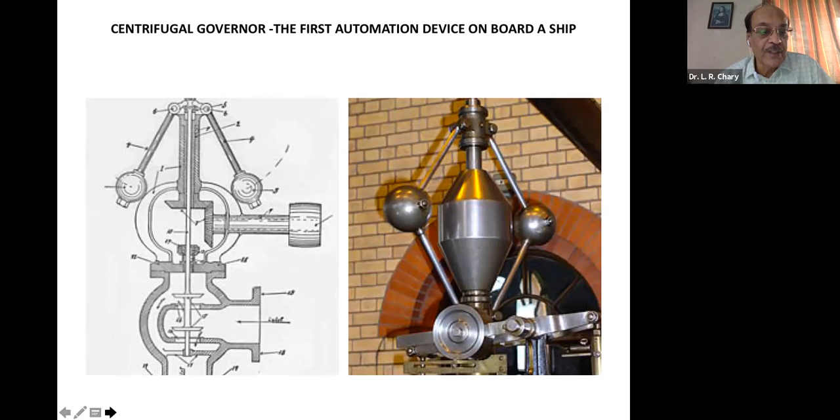Now let's take a look at the other automation devices that came. In 1908, the gyrocompass, followed by the autopilot. Autopilot is the name given to the device on board aircraft, but it used to be called self-steering gear on board ships. In 1925, it was boiler automation and the echo sounder. Between 1936 and 1940, during the war years, it was radars.

Between 1965 and 1970, many automation devices came on board, starting with the main engine, generator, and condition or trend monitoring systems. Classification societies like Lloyd's Register and DNV gave names like UMS, Unmanned Machinery Space, and E0 class of ships. Then between 1970 and 1975, satellite navigator and locator; 1975 to 1980, shipboard computers and LAN; 1980 to 1985, satellite communication and GPS; then in 1990, programmable logic controllers.

Between 1995 and 2001, we know all GMDSS equipment came on board. In 1995, the concept of the Internet of Things was introduced, surprisingly not by an engineer but by a businessman who wanted all his businesses and factories to be connected. The development of autonomous ships started way back with the Chinese in 1970 — it is definitely not of recent origin. This went on up to 2018, and between 2018 and 2021, autonomous ships were launched.

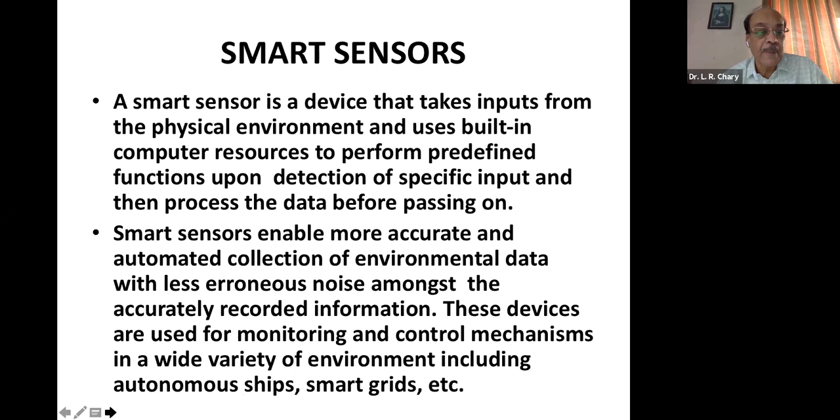I'll give you an example which will convey it better. You have on board a ship, generators, and in the generators you have the windings, field, the armature and field windings. In these windings are placed temperature sensors called PT100 to monitor and sound the alarm if the temperature of the generator goes up. So when the alarm comes, the electrical officer goes, takes a look at it, feels the temperature of the generator. If it is too hot, he shuts it, opens the generator, sees whether the sensor is defective.

Replaces it with a new sensor and starts it off. But when you have an autonomous ship with nobody on board, who will do all these things? So in an autonomous ship, a smart sensor takes care of everything. There are two sensors implanted there, in what is called a watchdog mode. One watches the other's performance, and if one of them goes wrong, it automatically switches to the other.

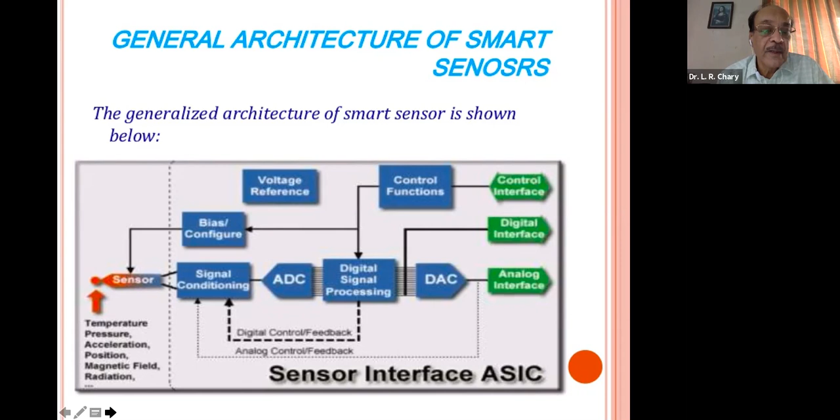We'll see, because it is about sensor and sensor fusion, what this sensor fusion technology is about. Sensor fusion technology is the technology used to combine data or information from a variety of sensors such that the resulting information has less uncertainty or more clarity than what would be possible when these sensors were used alone.

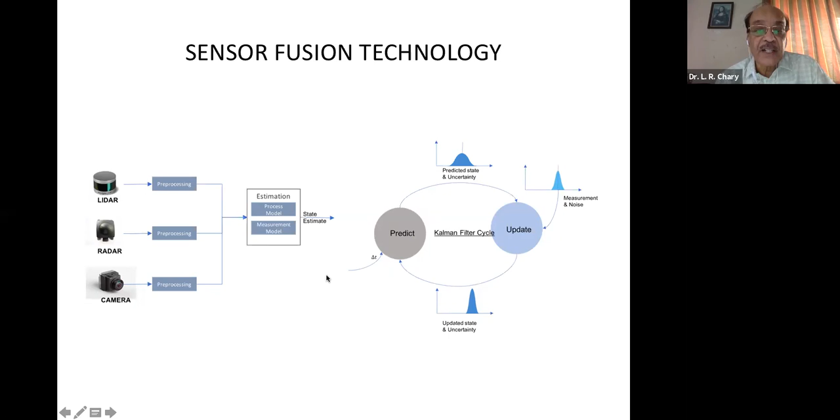Mathematics will not leave you. So all of you sip your cup of tea to keep awake.

Sensor fusion technology uses a Kalman filter, which is not a physical device, but an algorithm based on control systems. This is called the state of the system. State here, in simple terms, is the position, velocity, and acceleration of the target ship. Then you have a measurement device which measures it, and these two are compared, and it generates what is called the Kalman gain. This gain refines the data and gives out finally the exact clear version of the position, velocity, and orientation of all the target ships.

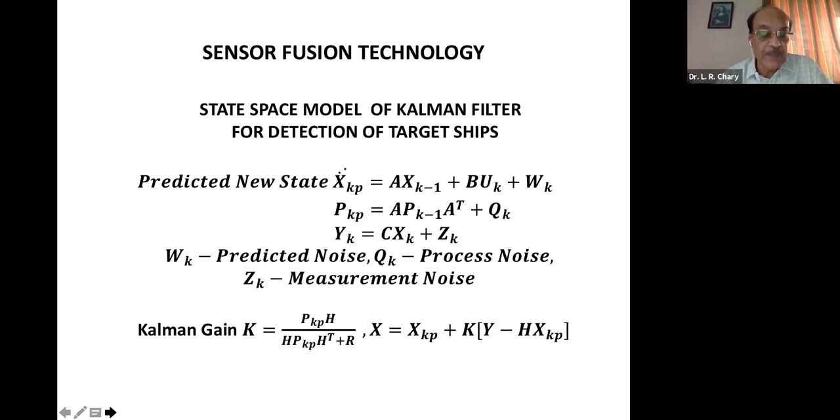This is how it works. Let's not go too much into it. This is the state space equation, and this is the cycle which you saw, the Kalman cycle.

Is Kalman filter the only filter? No, there is another called the particle filter. Which is better? Both are good. In the Kalman filter, the inputs and outputs follow Gaussian distribution, with little randomness. But if you have a situation where the inputs and outputs are stochastic, the particle filter does a better job.

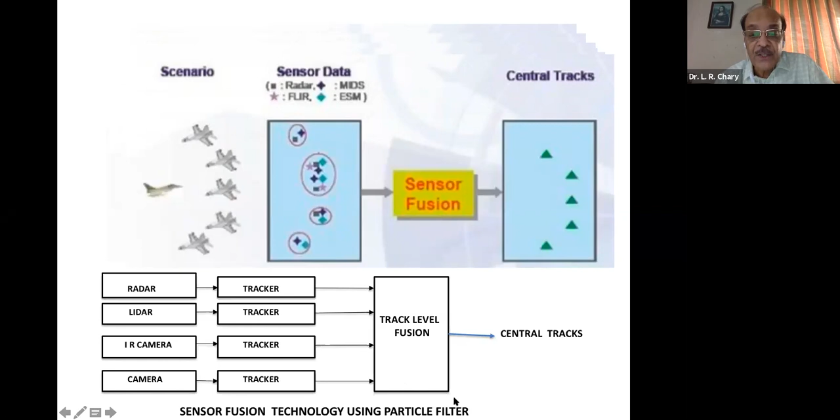Those of you from Calcutta must know the ISI, Indian Statistical Institute. It was headed by Dr. C.R. Rao, who after retirement went to the USA. He's still alive, 100 years old, and he contributed a lot to this particle filter.

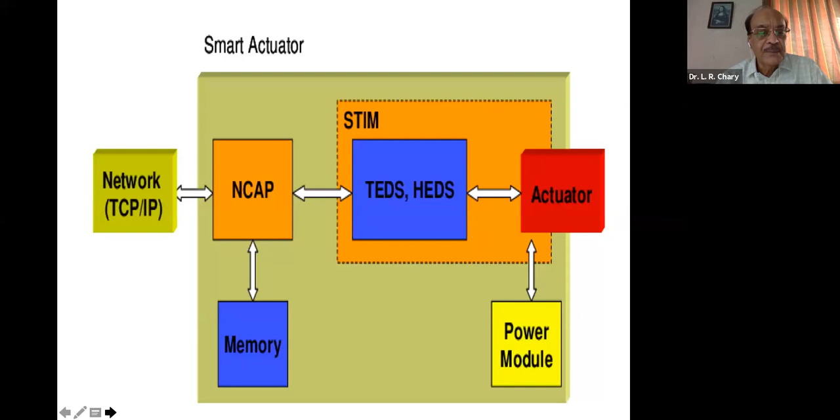Now we come to the Internet of Things. It is a network of physical devices, appliances, and other items embedded with electronics, software, sensors, actuators, and network connectivity that enables these objects to connect and exchange data without requiring human-to-human or human-to-computer interaction. This is a bookish definition. Each object is uniquely identifiable through the embedded system, but is able to interoperate with the existing internet.

This is better depicted with a diagram, the Internet of Things diagram: any device, anything, anybody, anywhere, any service, any business, any path, any network, any place. This is precisely what Internet of Things means - total connectivity, where each can communicate with the other through humans or even directly.

This is the ship systems all of you are familiar with - the maneuvering system and navigation system on the deck side, and on the machinery side you have machinery management, power management, and propulsion control. Propulsion control is with the navigation system, alarm management, cargo management, and ballast management. These are the engine side smart systems, and these are the deck side smart systems.

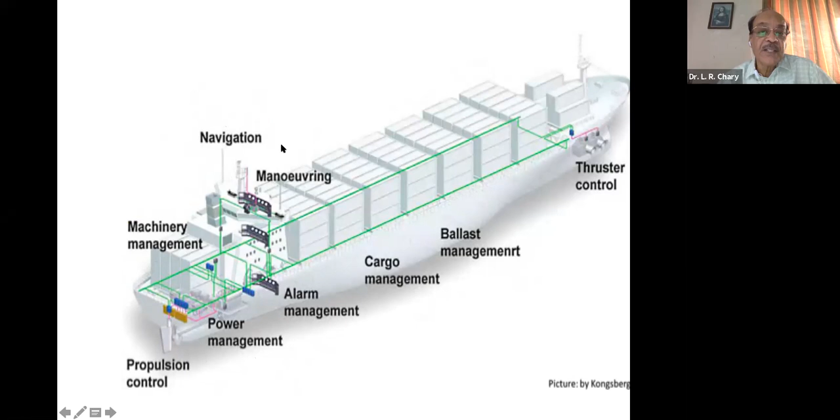When you put them together, it becomes the Internet of Things for ships. All these are a network of smart systems - machinery management, power management, etc. - which you have seen. And each one of these systems is made up of a network of smart subsystems.

This is how the diagram of a smart ship would look: you have all the deck side smart systems, all the machinery side smart systems, and then all of them connected. It is connected to a backbone, and that is connected to a SATCOM or VSAT.

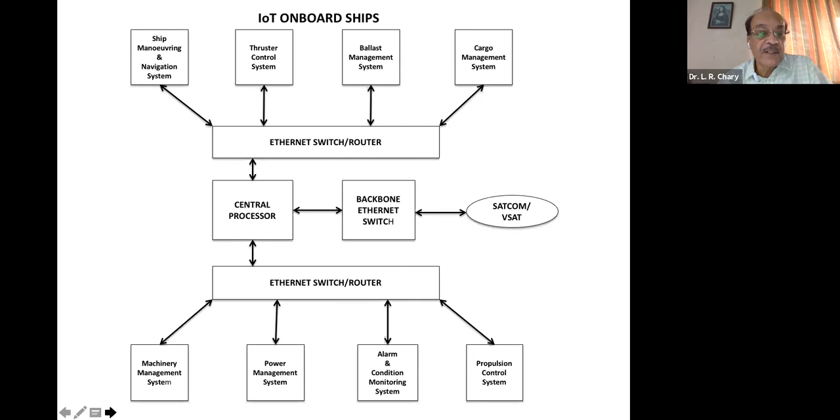But something is missing - can you guess what it is? This is all about what is happening inside the autonomous ship. But what about outside, just outside? That is more important for navigating the ship. That is missing here, and this is what it is - it's called the situational awareness system of an autonomous ship.

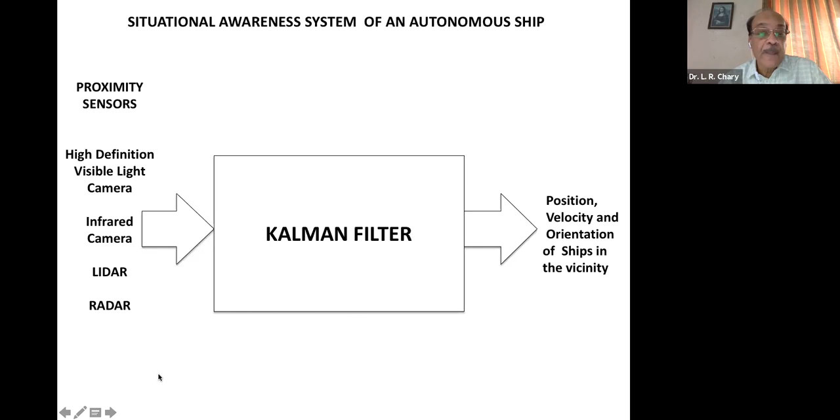We saw the Kalman filter, right? These are the sensors for the Kalman filter: high definition light camera, infrared camera, LiDAR, and radar. It filters out unwanted data and gives the position, velocity, and orientation of all the target ships. When that is plugged in here, it completes the Internet of Things on board autonomous ships. You have smart systems here, smart systems here, and a smart system telling the ship what is happening outside.

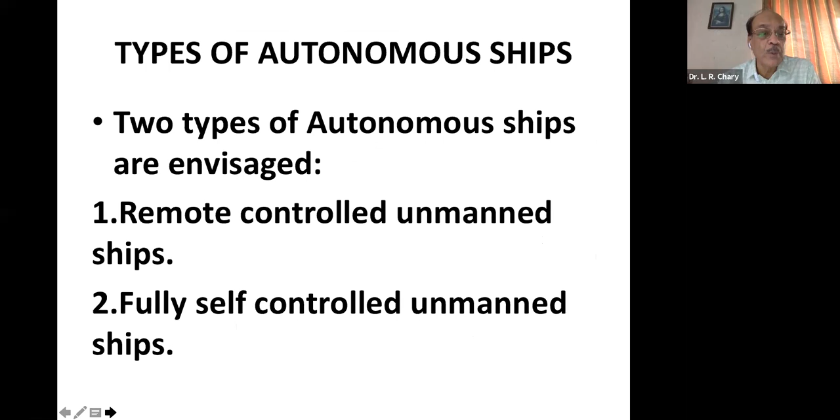It can be controlled from outside, from a remote center, or it can be self-controlled. There are two basic types of autonomous ships: remote controlled unmanned ships, which can also be remote controlled manned ships - that is what NYK has also started with these autonomous ships, you will see about it later - and fully self-controlled unmanned ships. Now, this diagram captures it all. This is a normal ship about which all of you know.

This is the remote control ship. This is the one which senses what is happening outside the ship, gives input to the shore-based controller who controls the ship, and through satellite, he controls the action of the ship itself.

This is a totally automated ship without anybody intervening. It is a fully automated ship where the computers do all the control and navigate the ship. And this is a combination of both.

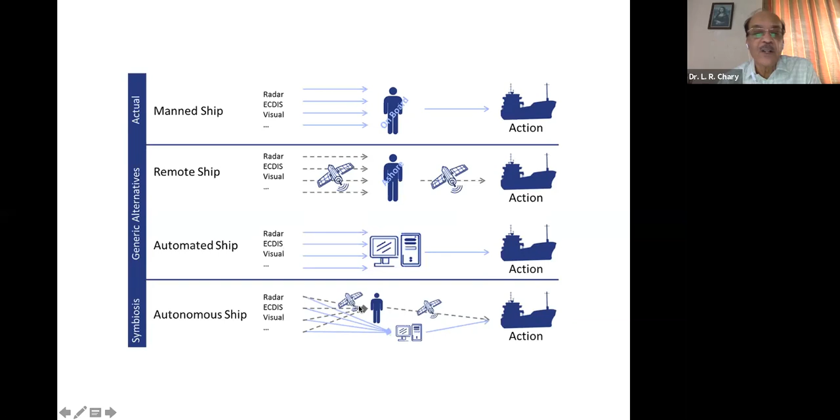Now we'll take a deviation here and see how an artificial intelligence captain navigates in autonomous ships and how he avoids any possible accident. Now, the governing equation comes under what is called reinforcement learning. You have artificial intelligence and you have machine learning. Machine learning is a subset of artificial intelligence. And under machine learning, you have three types of learning: supervised learning, unsupervised learning, and reinforcement learning.

So for autonomous steering of ships, the reinforcement learning algorithm is used. This algorithm is based on the Bellman equation for a decision to alter the course of the own ship to avoid possible collision. This is the mathematical expression.

What it says is the utility or usefulness of taking a particular maneuvering action will depend on the immediate reward and all the future rewards with a discounted factor. The above equation is the Bellman equation, which is solved iteratively, which we will now see how it is done. This is the utility or usefulness of the decision you take, which is based on...

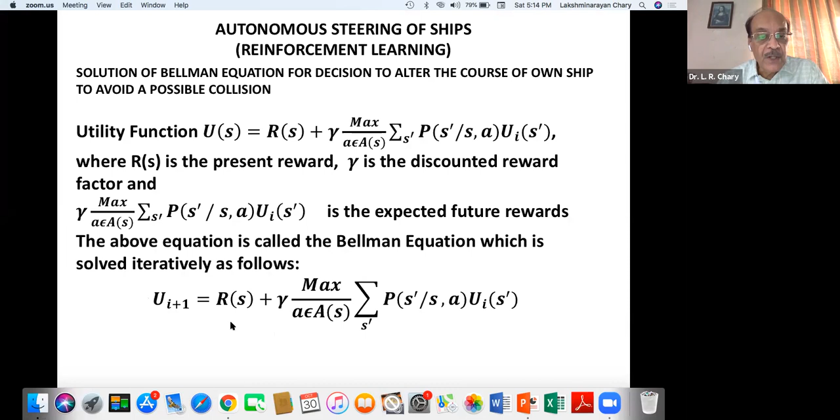So this is the utility function, present reward and all future rewards. Based on this, the decision to steer the ship to the starboard side or port side will be taken. But you know the rules of the road: the reward is when you encounter another ship coming in the opposite direction, you are supposed to steer to the starboard side. So there is a positive reward.

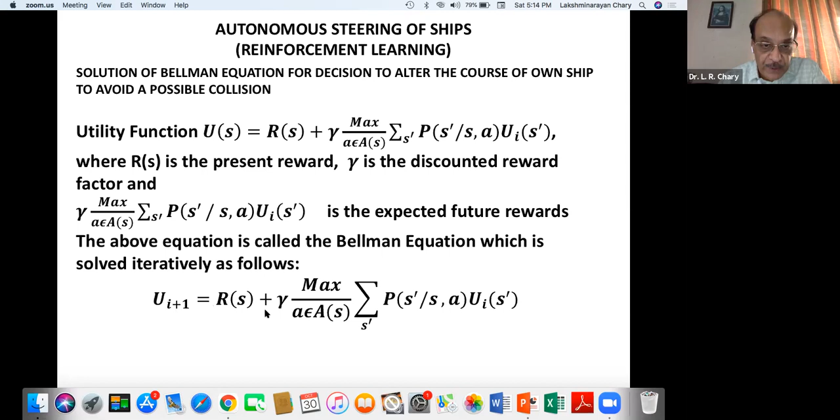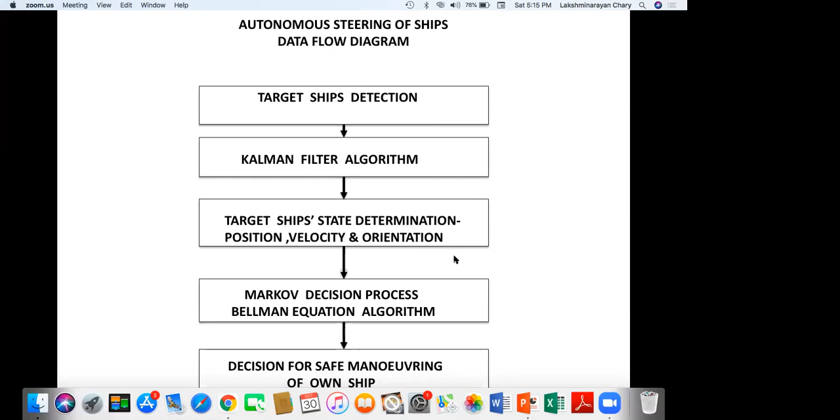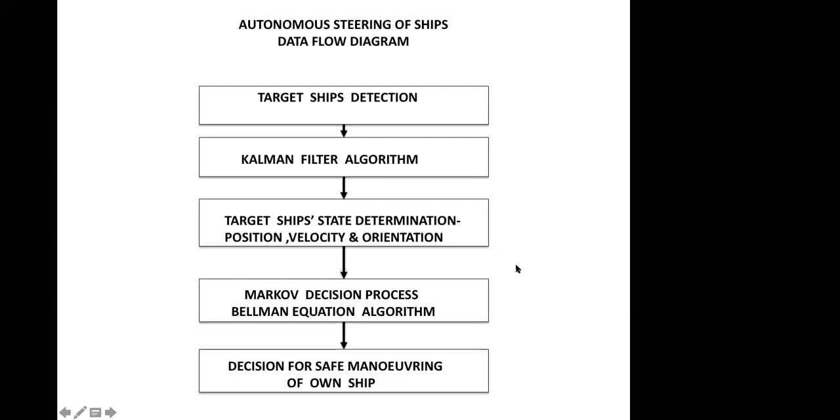So we are losing track, we are losing your voice. Ijaz, can you come in, there is some problem? Reward, yeah. Yeah, so we can see you again, sir. I think we are going back to this diagram, right? Can you see this now? Okay, one thing, maybe we can see the PPT, but I think there is lesser bandwidth right now, so if possible we can switch off the video during the presentation, I think that may help us. Hello, can you see it now? Yes sir, we can see it. Sorry to intervene, but I agree bandwidth is the problem, they can switch on and off the video. We can't hear him now. Let's just wait for a little while, I'm sure he's trying to get back properly, maybe he's having some issue. Right, yeah, we can hear you and we can see the screen now, sir.

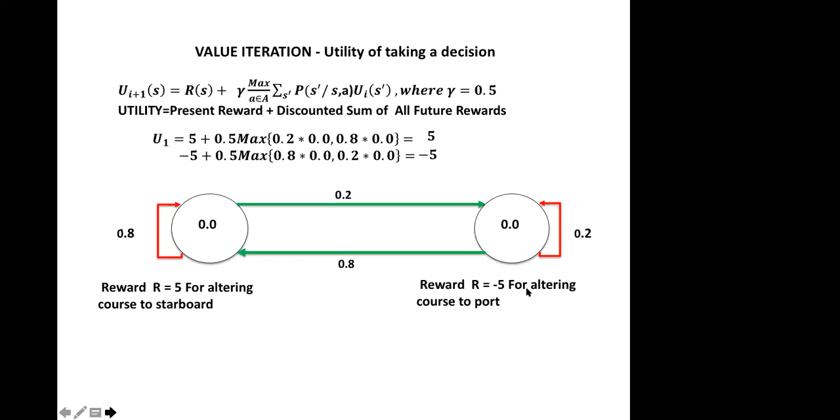Now you will see the iteration operation in this. The first iteration after initialization, a reward of 5 is given to steer to the starboard side, as you see it here, and a reward of -5 is given if the AI captain tries to steer to the port side, because he will definitely go and hit the ship from the opposite direction. So you initialize with that and then go to the second iteration: 5 points here, -5 points here. Okay, so the next iteration, it goes to 7 points here and -3 points here.

The third iteration, again, it goes to 7.8 and -2.2. The fourth iteration, it will again increase to 8.2. So this is how the iteration takes place, and the decision will be taken when finally it settles down to the best value. And how do you do that?

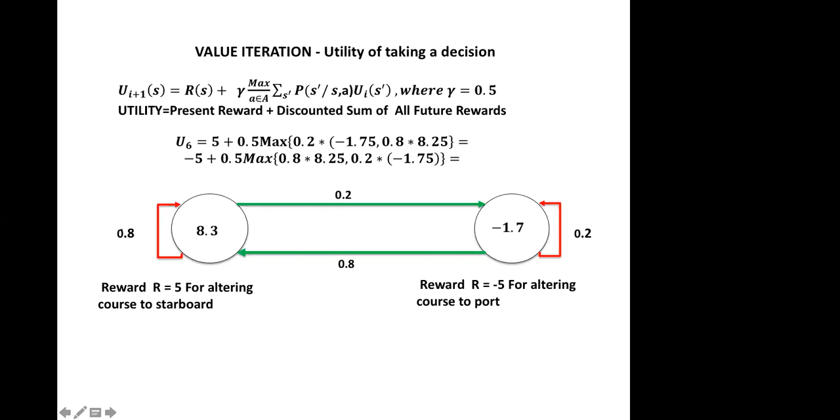Now this is 8.25 and -1.75, and then the next iteration, the sixth iteration, it becomes 8.3 and minus 1.7. Now you compare the last two iterations: if it differs by 0.05, that is the saturation point, and you can safely say that since 8.3 is greater than -1.7, you must steer the ship to the starboard side, and that is what it says in the foregoing six iterations.

Now, how long will this take? Because of the speed of the computer, the entire process takes a couple of milliseconds to arrive at this decision.

Okay, now what happens here on? We go back to this diagram. This is the situational awareness system, where the Kalman filter is sitting, and the Bellman equation receives the inputs from the Kalman filter. The iteration is done here, and based on which is the most advantageous maneuver, the ship is turned in that direction.

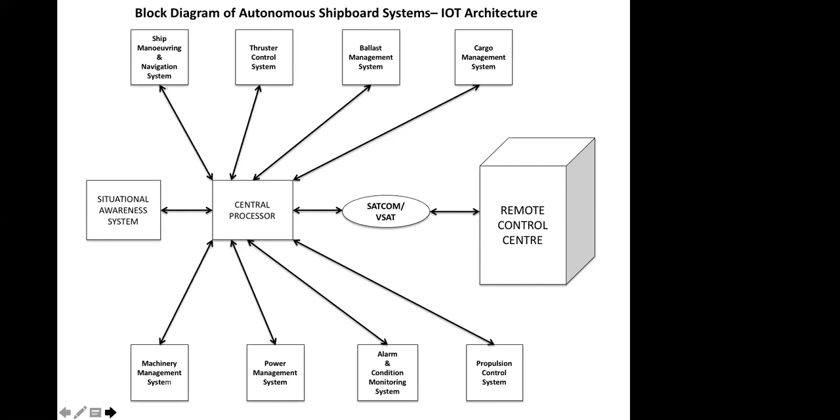Again, it is advantageous to steer to the starboard side because that is what the rule of the road also says. Now we will see it in action.

This is the first project they started of autonomous ships. It's going to take off in a couple of months. It is called Yara Birkeland. What you have to notice here is how the ship navigates to the starboard side when it faces a ship in the opposite direction. Okay, now here it is.

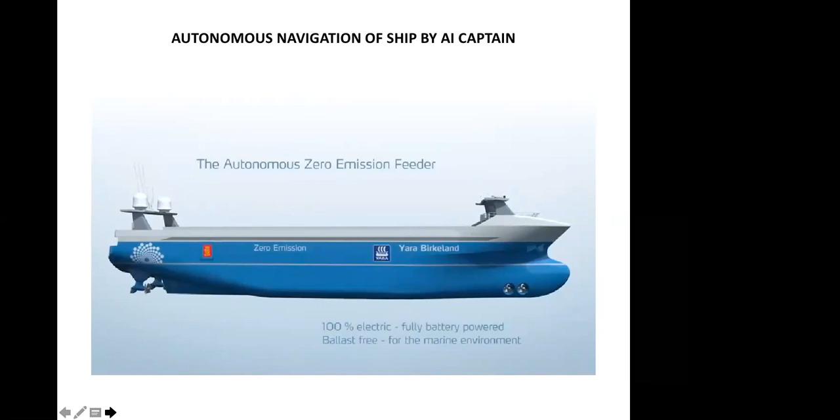They were formerly moving all the containers on land. Now they want to shift it to an autonomous ship. The containers are loaded automatically, autonomous loading. So more jobs lost.

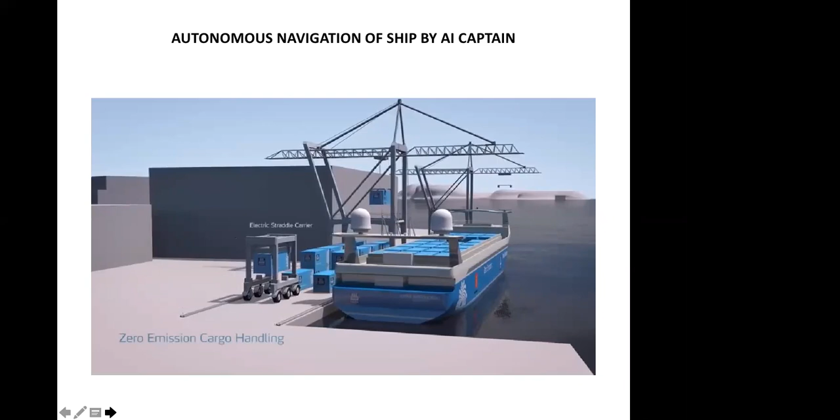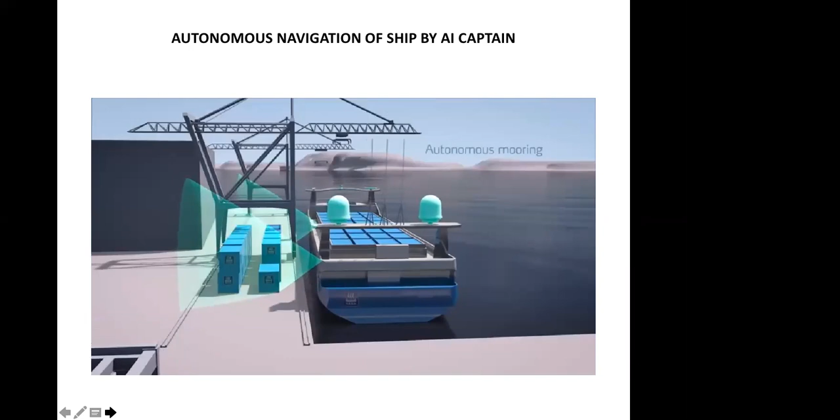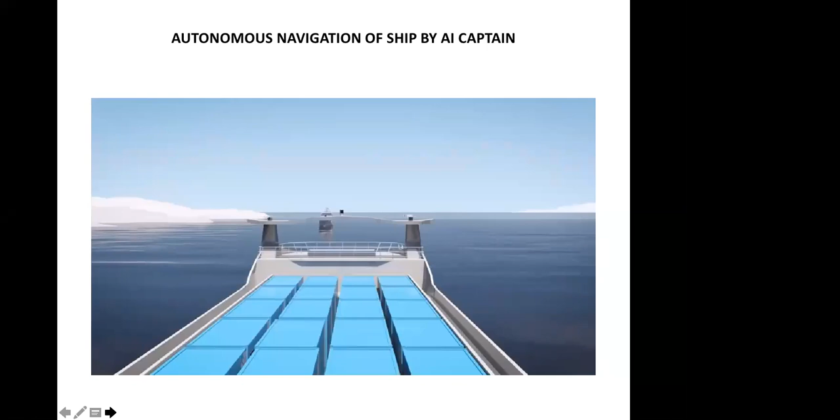After the loading, a preferred route is charted. The ship undocks by itself and sails autonomously. After some time, it will face another ship in the opposite direction and maneuver itself to the starboard side to avoid collision.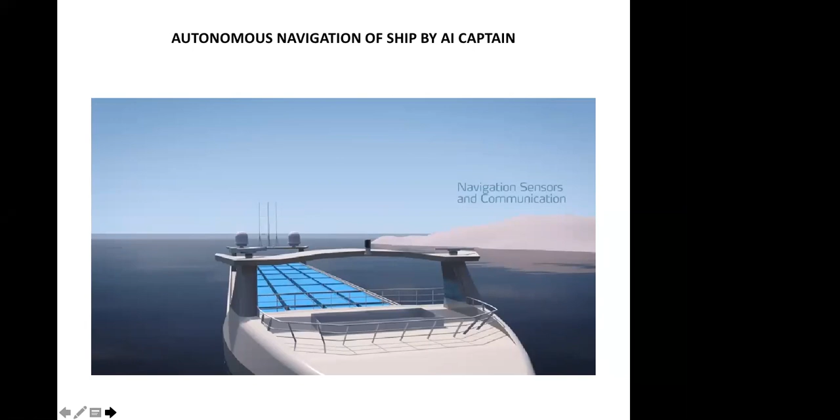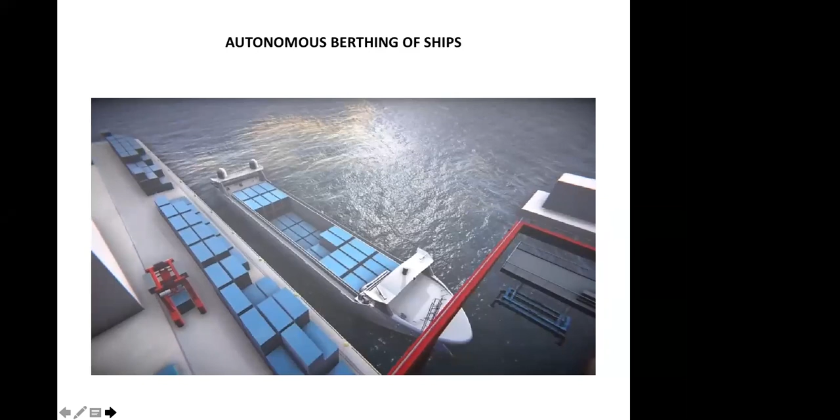Now we will see an autonomous berthing, how the ship autonomously berths. This is by the McGregor people. They have devised the system. It is for the same ship. Have a look.

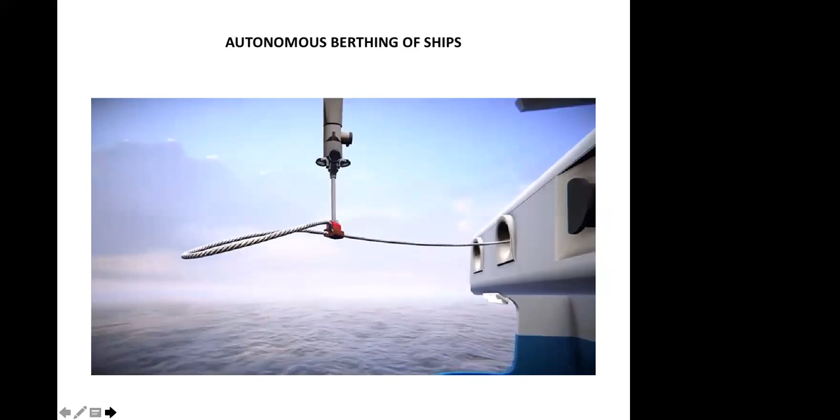So all made fast, declared without the berthing crew, and the ship will start loading or discharging. So many more jobs threatened.

Now let's look at the pros and cons of autonomous shipping. Yes, let's first look at the pros. Short port stay, faster turnaround, both are linked. No crew cost, hence lower operating cost. Because of this, lower freight rates. No accidents due to human error or failure because there is no crew on board. No cases of criminalization of seafarers. No dependence on crew supplying countries like India, Bangladesh, and so on. And the ship owner is in full control of his ships.

Let's look at the cons. Vulnerability to cyber attack, you saw the diagram. Anybody, just as a person sitting at the remote center can control the ship, anybody who can hack in also can control the ship. Increased piracy threat. Obviously, if you think you are advanced, the pirates are more advanced than you. They can hijack your ship, unload all the cargo, and then leave it alone.

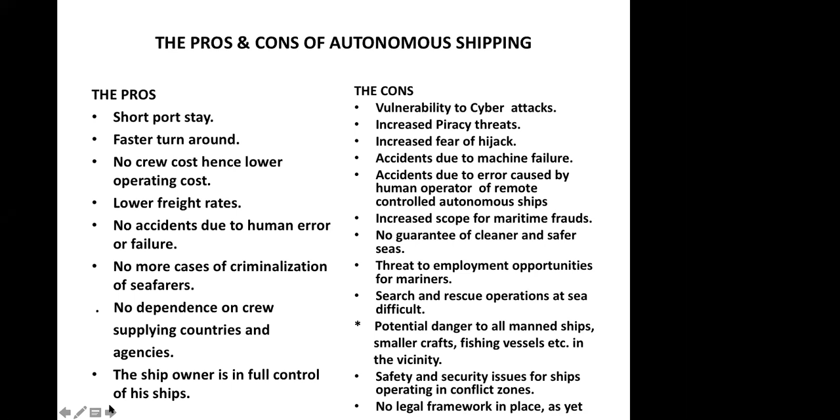Now let's take a look at what are the existing conventions: SOLAS, COLREG, Rules of the Road, MARPOL, GMDSS, STCW, Maritime Labour Convention. All these become irrelevant because they are all applied to manned ocean-going vessels. Hence, these conventions need to be reviewed and regulatory requirements redefined by the IMO to make them relevant to autonomous shipping.

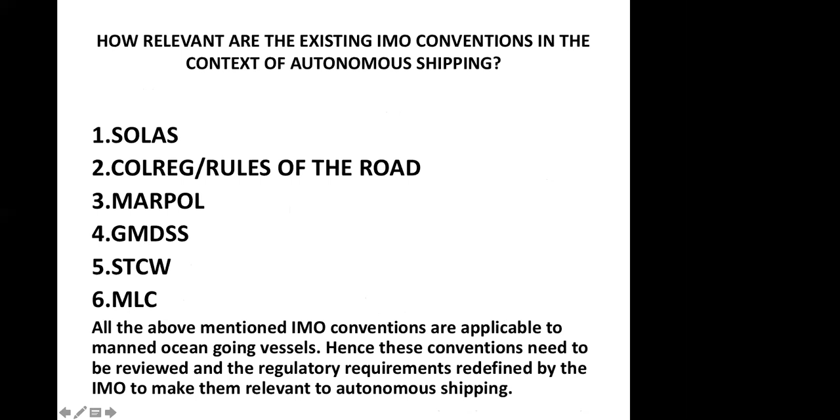Let's look at the journey to autonomous ships. We started with automation in 1965. Then progressively the automation increased on board. In the 1970s and 80s, there were 70 to 80 crew members on board, total strength. Soon that started reducing. Some large ships got reduced to 28 or 20, and even to 10 in the 90s. Soon you'll see large ships without anyone on board.

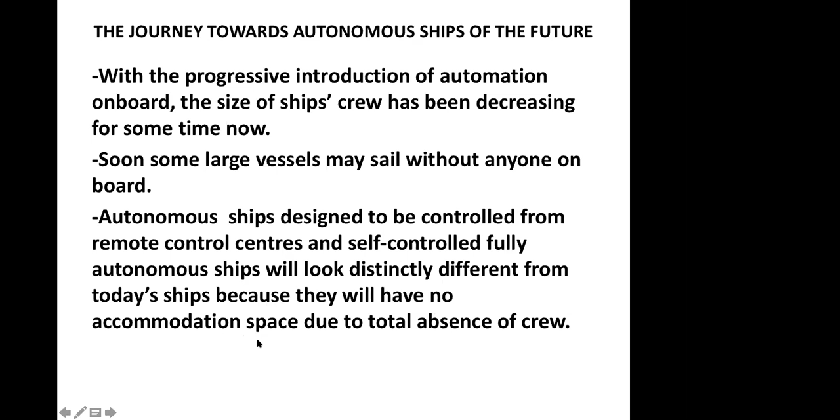Autonomous ships designed to be controlled from remote control centers, and self-controlled, fully autonomous ships will look distinctly different from today's ships

because they will have no accommodation space due to total absence of crew. The remote control center will play an important part on autonomous ships, whether they have crew on board or not. Even when ships are able to operate completely on their own, they will have to have somebody on shore who will take charge if and when some condition demands.

Different types of ships, or ships at different stages of their voyages, in all likelihood require different levels of oversight and control from the remote control center. A cargo ship, for instance, far out at sea, will normally need very little human supervision. With a single shore-based controller or commander, many ships can be controlled at the same time.

But when a vessel is operating in a congested shipping lane, close to shore, or while entering or leaving a port, it will require much more care and full attention of an individual controller or commander sitting at a control station.

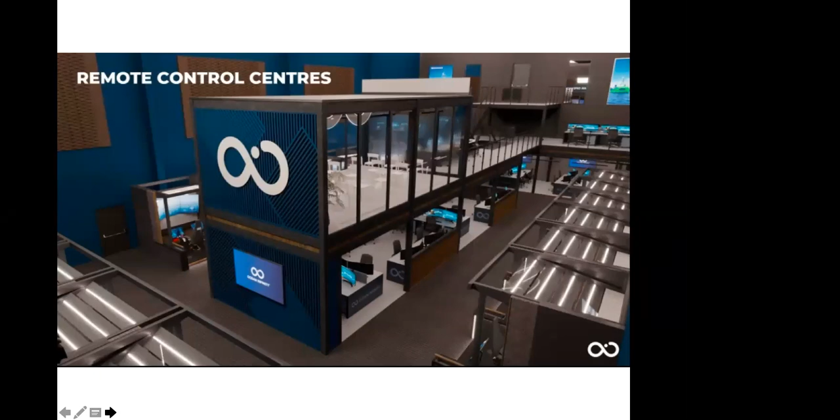What are the benefits of autonomous shipping? These benefits are envisaged by the concept developers. They say it will be safer, more efficient, cheaper to run, have large cargo carrying capacity, offer lower wind resistance due to no accommodation so fuel consumption will be low, and help owners and operators respond to a growing shortage of crew. This appears to be one of the major reasons why all these concept developers are very keen on implementing autonomous ships.

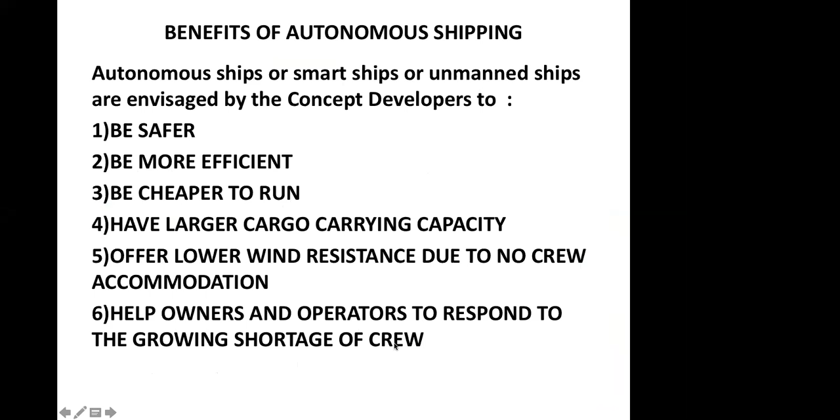What are the challenges before autonomous shipping? Regulatory changes are required to allow autonomous ships to operate safely. Safety is one important factor. Insurance and legal liability related issues in the event of an accident - nobody knows how the insurance companies and legal people will deal with a situation of an accident happening with an autonomous ship. Cybercrimes will be there, and piracy attacks will also be there.

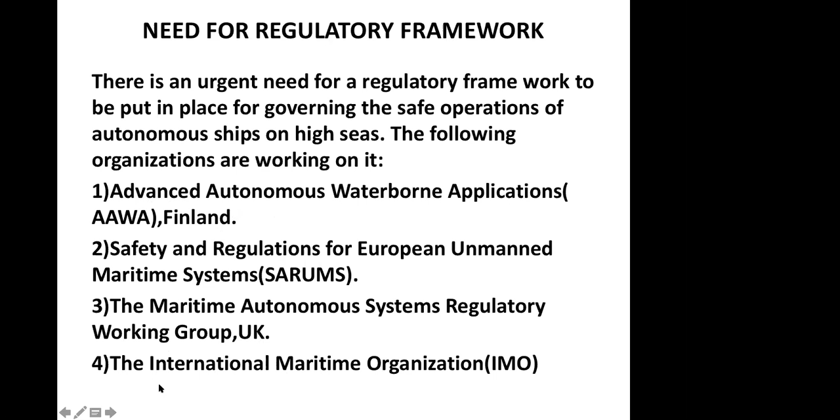So therefore there is a need for a regulatory framework, and there is an urgent need. These organizations are busy working on it: the Advanced Autonomous Waterborne Applications in Finland, Safety Regulations for European Unmanned Maritime Systems, the Maritime Autonomous Systems Regulatory Working Group in the UK, and the International Maritime Organization. There are also organizations in Korea and Japan working on a regulatory framework.

Now this is something futuristic, the shape of things to come. AR stands for augmented reality. Augmented reality, which is already being used ashore, will soon find its way on board ships for troubleshooting purposes. Take a look at this.

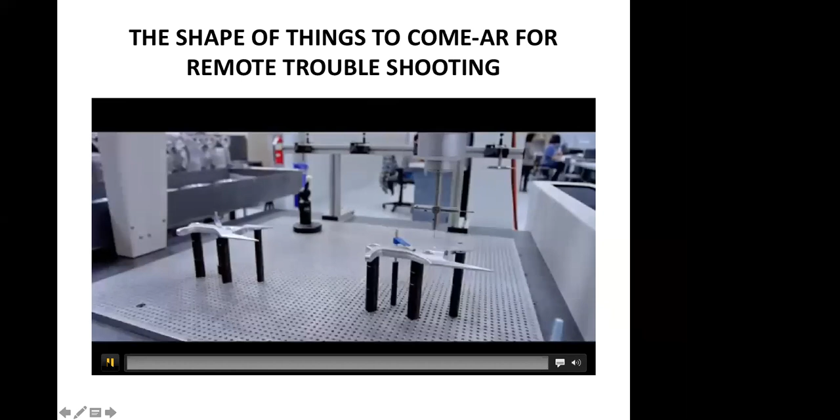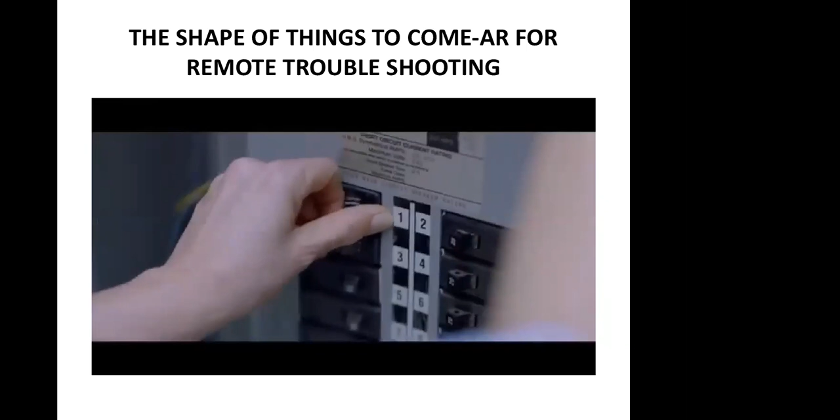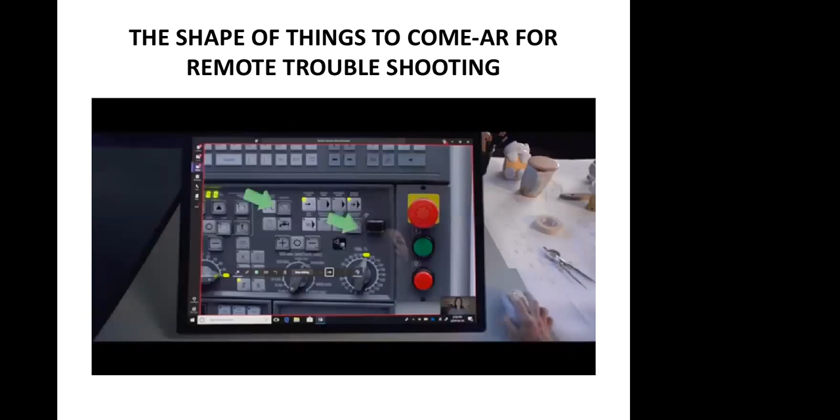What if there was a way for employees to work together from anywhere when everything is on the line? Employees are the heart of every business. It's their resourcefulness, ingenuity, and drive that get the job done. But even the best employees need help from people who aren't there with them. Now employees on site can work side by side with experts in remote locations. In an instant, they can share what they see, lend a helping hand, walk through the process step by step, helping solve problems in real time.

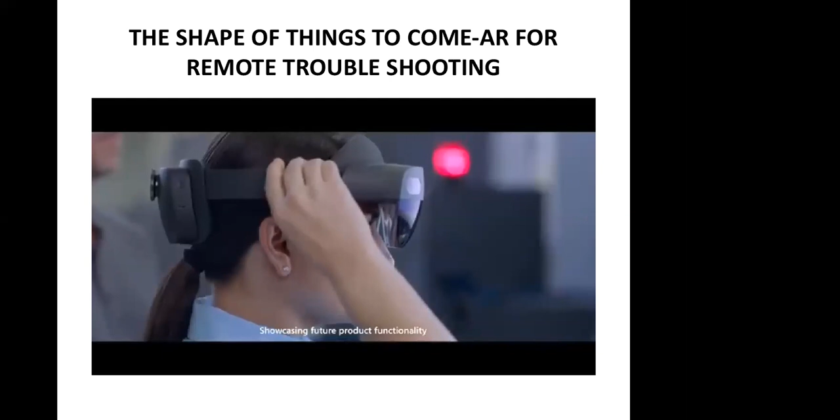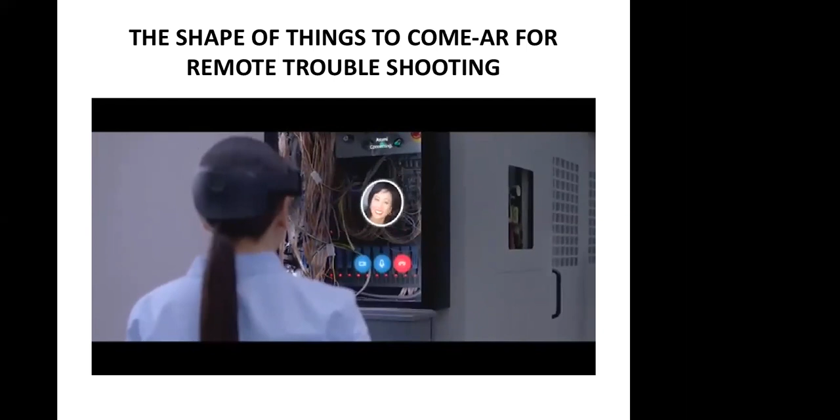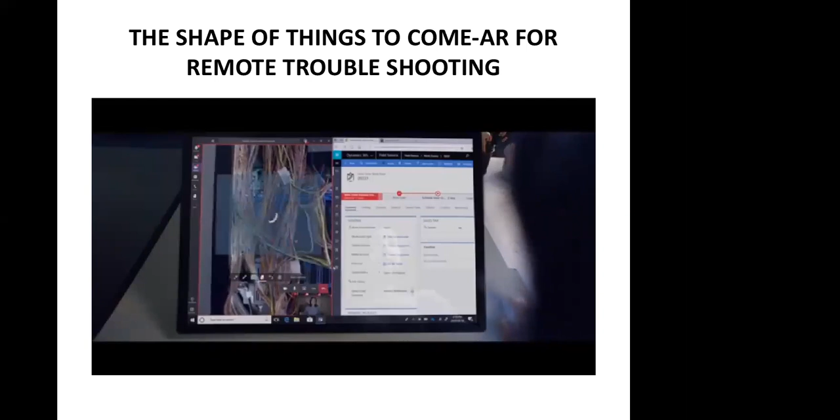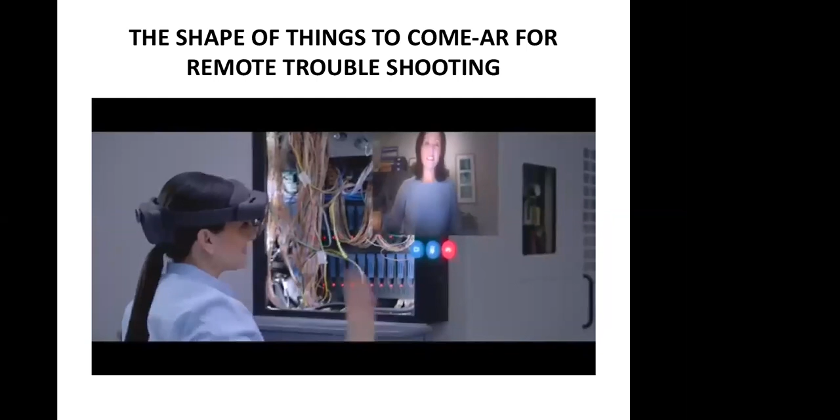This is a new vision for work. Now employees can work smarter and bring in the people they need with just a tap. They can troubleshoot, repair, and perform with confidence and speed. They can move freely, pull critical information into view, and stay focused on the task, their hands free to do the work. This is collaborative problem solving at full speed - your people, united across time and distance, more connected, more informed, and more efficient. Now employees can work together from anywhere. They can go there without being there. This isn't the future. This is here and now.

This is here and now, and it will soon make its entry on board ships, not only for remote troubleshooting but also surveys. A surveyor sitting at headquarters can survey machinery, whether deck machinery or engine machinery, using augmented reality, which is real and surreal superimposed.

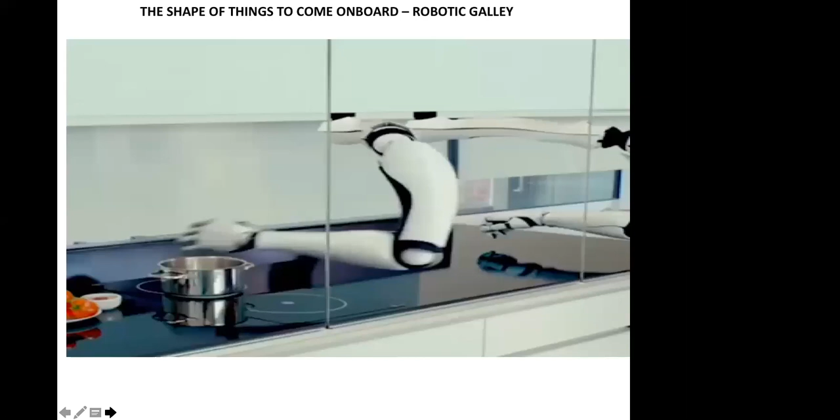This is another example of the shape of things to come. If there is nobody on board, or only a few people, with no galley crew, then you will have a robotic galley.

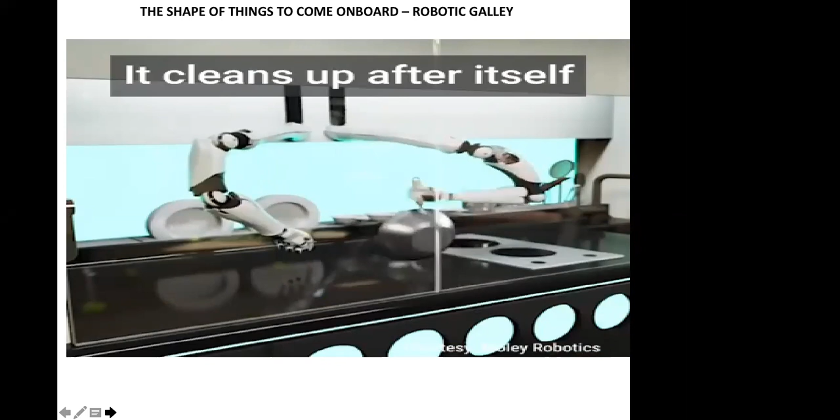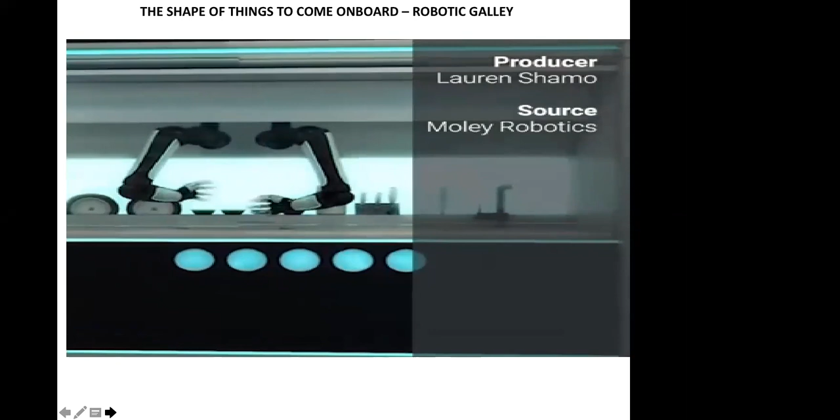Well, that's how it's going to be in the future on board passenger ships or cargo ships, if there is anybody on board. Now, there has to be a catering service on cruise ships. This is how the catering service will be, with minimal catering crew on board.

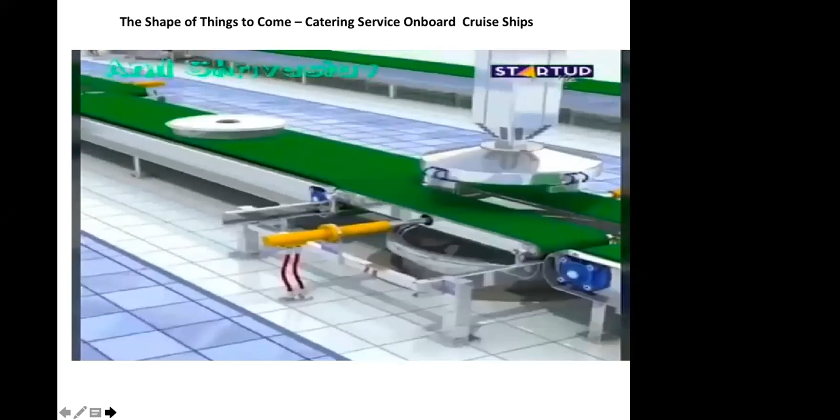The food is automatically prepared by robotic cooks in the galley, and it is sent automatically to various tables once the waitress books the order and clicks a button.

The era of autonomous ships has already dawned. The first autonomous ship was a car ferry named Falco. Its maiden voyage was on 3/12/2018 from Parainen to Nauvo in Finland. The return voyage was under remote control from a control center located 30 kilometers away from Turku. This is the remote control center, and this is the ship. It was not tailor-made, but an existing car ferry which was converted into an autonomous ship.

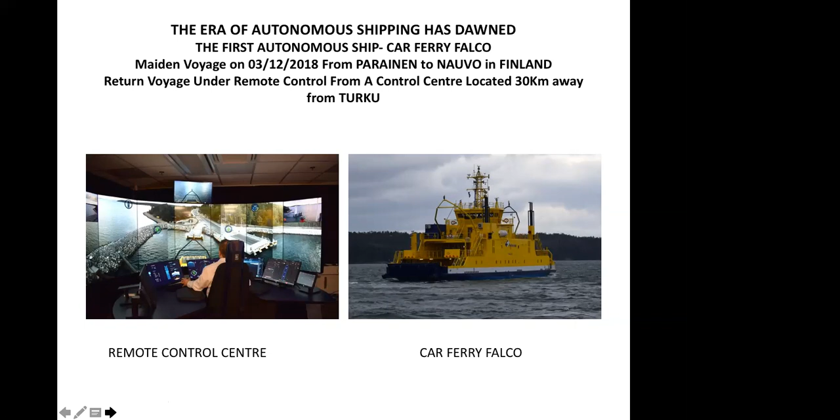We'll try to have a look at how the ship performs.

This is all in silent mode. You'll have to read whatever instructions come there. This voyage was done from Japan to China and back, and this voyage was done at night. You can see how the ship avoided collision with other ships by steering to the starboard side.

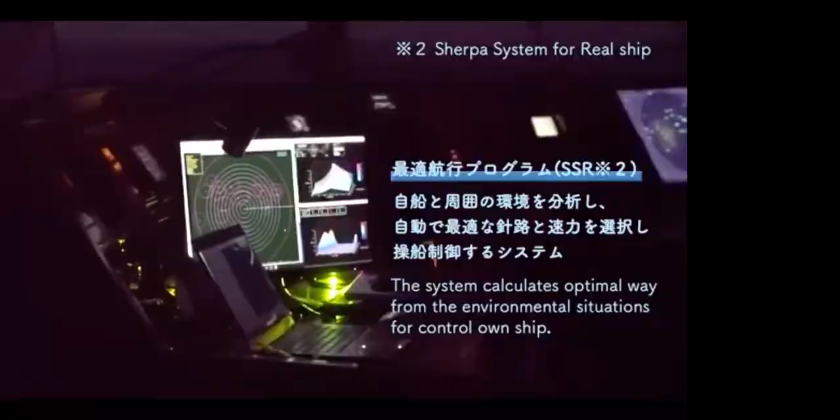The navigating system is called the Sherpa system, developed by the Japanese. The green line is the recommended course, and the white line is the planned course. So the ship changes its course as it sees other ships coming on its way.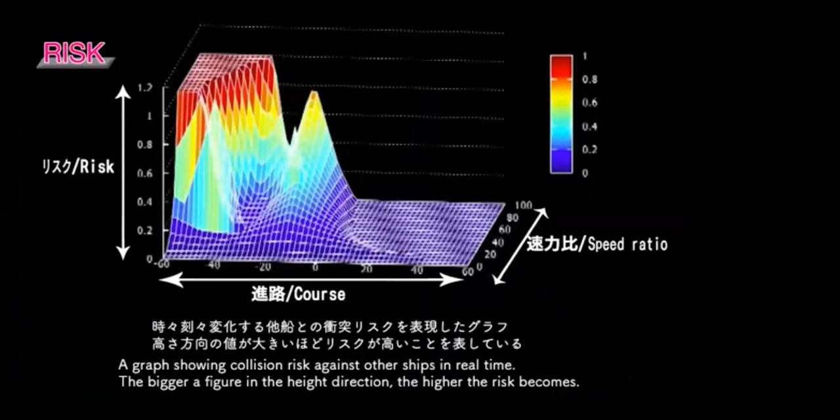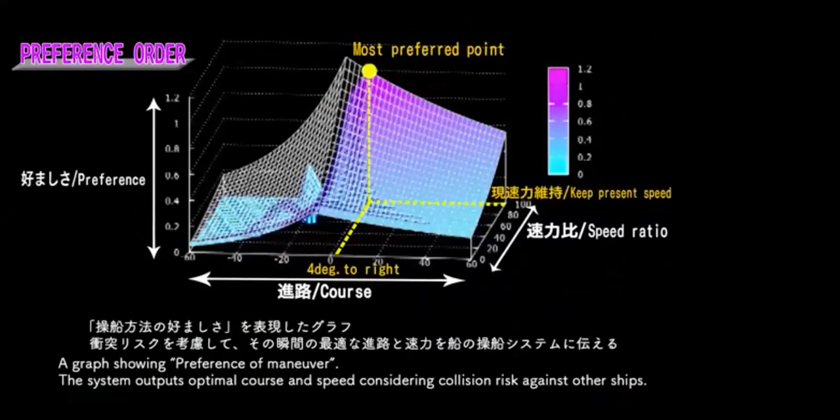And this is the computation you saw, the positive reward or negative reward, used to determine the correct maneuver.

Now it is switching over to MASS mode, autonomous mode. It is taking the recommended course to avoid any possible collision. You can see those red lights are the ships on its port side. It changed its course by 4 degrees.

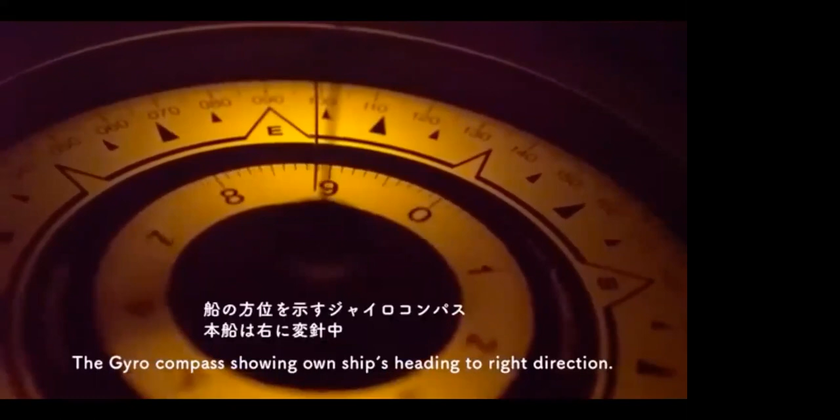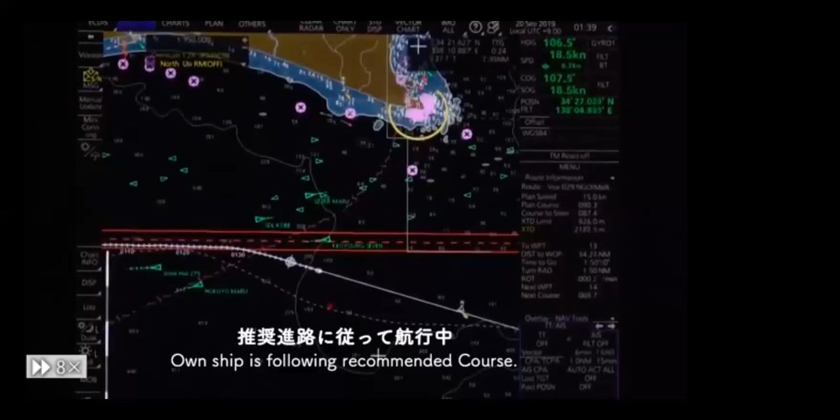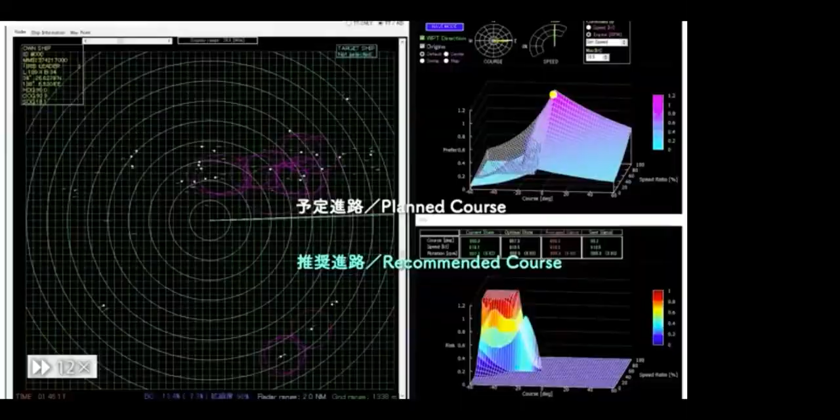It is avoiding the target ship, which is shown in green. On the recommended course, it comes back to the planned course after avoiding the target vessel. The trial was completed successfully.

Oh God. There is some problem here. Please click on join from browser. Joined from browser? Join from browser, the bottom one. Which one? I don't get anything here. There is something written 'join from browser' at the last line. I think that should work. No, it's not working, not there. Join from browser, where is it? I don't find it here. Okay.

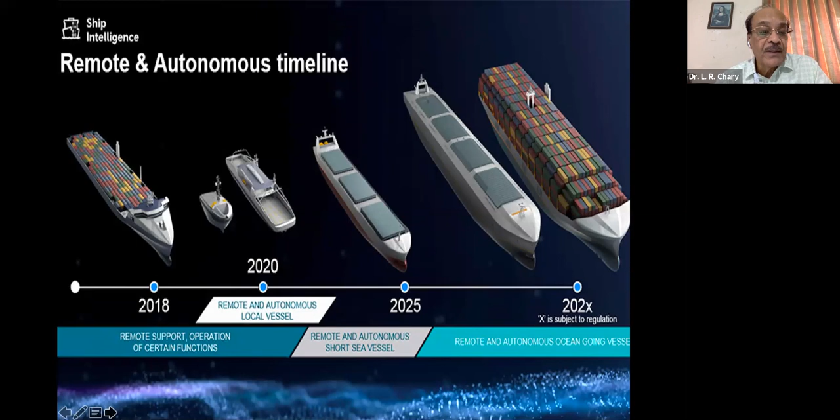Now, this is the kind of timeline for autonomous ships. We already skipped, we are somewhere here. By 2030, autonomous ships are bound to become the order of the day. So we conclude: advancement of technology cannot be halted. Autonomous ships with no crew on board is a distinct possibility in the near future.

But to reach this destination, a few more important milestones need to be crossed in order to make autonomous shipping absolutely safe, secure, reliable, and legal. There is also a need to ensure that there is no adverse socio-economic impact. Job losses is the socio-economic impact due to autonomous shipping.

Now, before we sign off, I would request you to ponder over these points. If man himself is imperfect, then can man-made devices be perfect? Automation could be a good servant, but could prove to be a bad master, pun intended. Disruptive technology is fine, but destructive technology is not.

So before we sign off, we go back to John Masefield the poet. If he were to reincarnate now in this day and age of autonomous ships, how will he rephrase the first stanza of his poem, Sea Fever? What he said then was: I must go down to the seas again, to the lonely seas and sky, and all I ask is a tall ship and a star to steer her by.